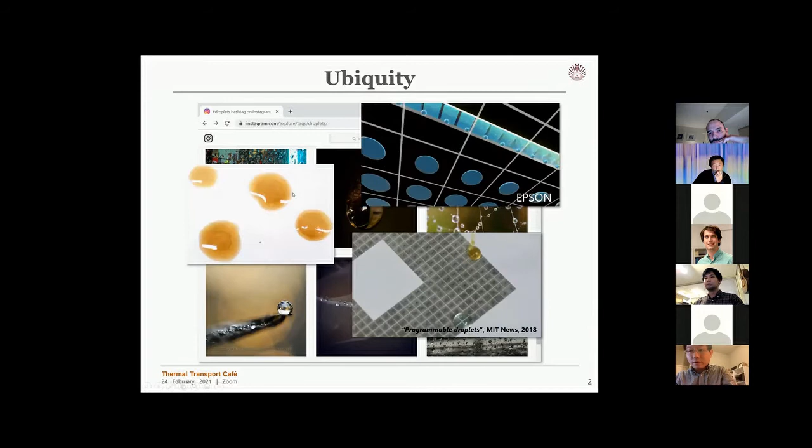So we make use of this so-called coffee ring effect. We can optimize the inkjet printing process or coating process. And if you can control the wetting behavior or flows, we can make a sort of droplet-based devices, making droplets more useful for a particular purpose.

I've studied many physics problems involved in droplet systems. I'd like to introduce a few of them. First, I have studied the wetting problem with droplets. We fabricated a surface which contains contrast of wettabilities, with micropillars arranged in stepwise patterns of different micropillar densities. If I place a droplet at the boundary between those two different patterns, we can see how the droplet moves. Obviously the droplet moves from the hydrophobic side to the more hydrophilic side, and we closely looked at how the drop walks toward the surface which has a lower contact angle.

And also I have studied the basic mass transfer problem, so basic evaporation process. Also, I have attempted to control the flow motion within the droplet using just the principle of Marangoni flows. I use a point heating source, either laser or micro heater, to generate the temperature distribution as I want. Following the temperature distribution, you can generate Marangoni flows in a particular direction. This is some of the work I've done for my PhD.

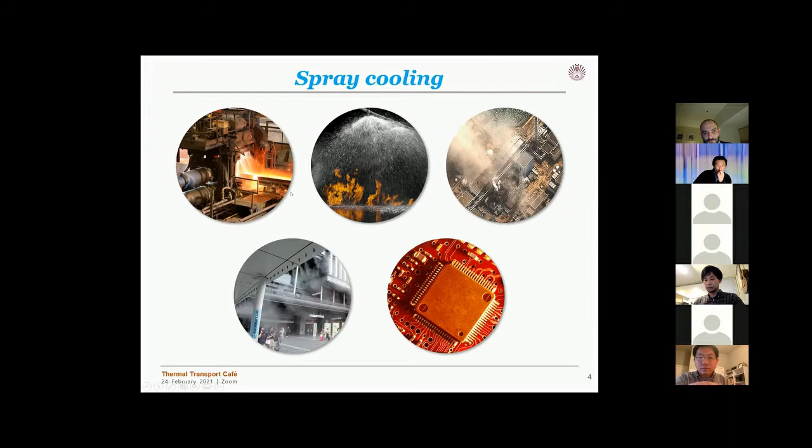But I'll be focusing on this particular application, so steel making process. This is a video of a hot rolling process at a steel company. You can see that this red steel plate, which means it's very hot—the temperature of this plate is around 1000 degrees Celsius—goes through the line, and you see lots of water sprayed onto the surface to cool it down.

Why we do this is we want to control the thermal history of the plate, so that we can change, or control, or create some microstructures within the material, which basically changes the strength of the material. So if you change the cooling profile, you have different microstructures, and you have a desired strength level.

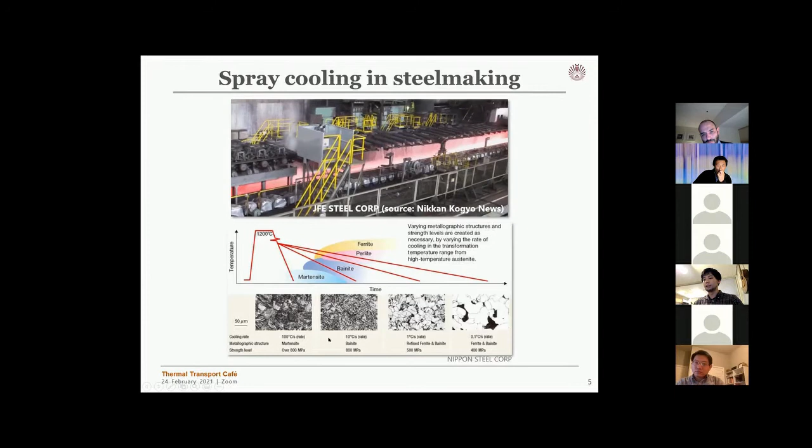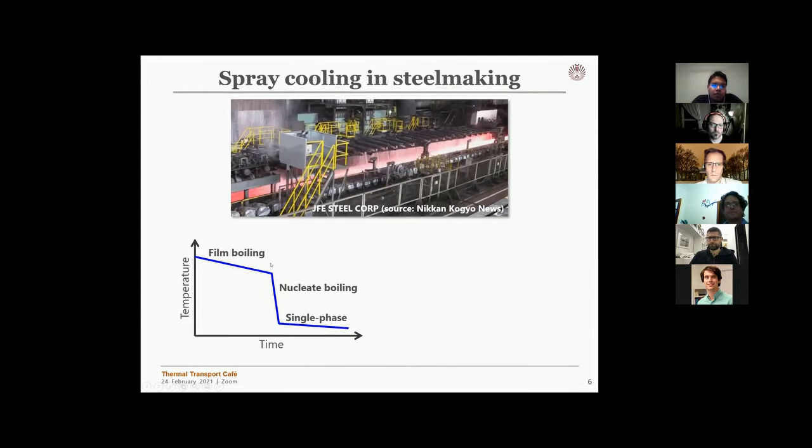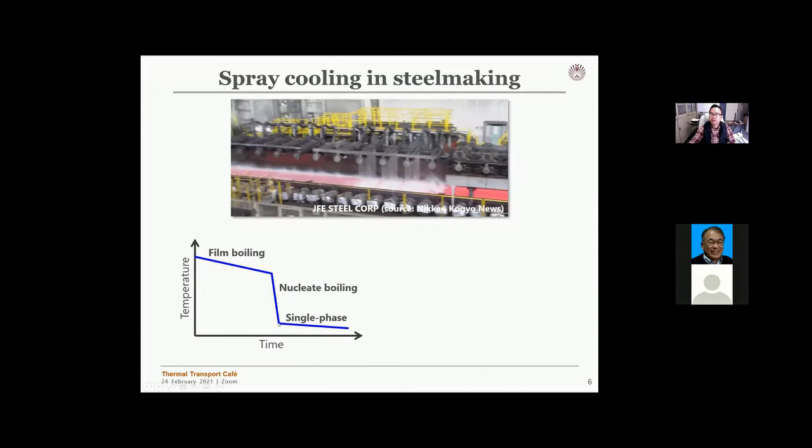This chart shows a typical cooling profile of this spray cooling process. If you take the temperature of the material as a function of time, since the plate starts at around 1000 degrees Celsius, you obviously start with the film boiling regime. Film boiling generally has poor heat transfer performance, so the temperature decreases, and at some point there's a transition from film boiling to nucleate boiling. When nucleate boiling occurs, the temperature drops rapidly to the saturation temperature, about 100 degrees Celsius, and then it goes to the single phase regime.

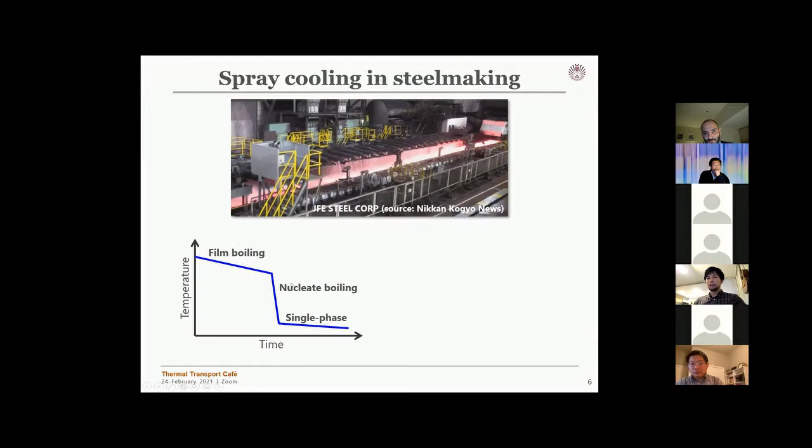What's important here is knowing when this transition happens, because once nucleate boiling occurs, the thermal history will be pretty much the same, since heat transfer performance is then dominated by nucleate boiling heat transfer. So it's very important to know how long the film boiling lasts and when the quenching happens, because this determines the whole thermal history, which determines the final product qualities.

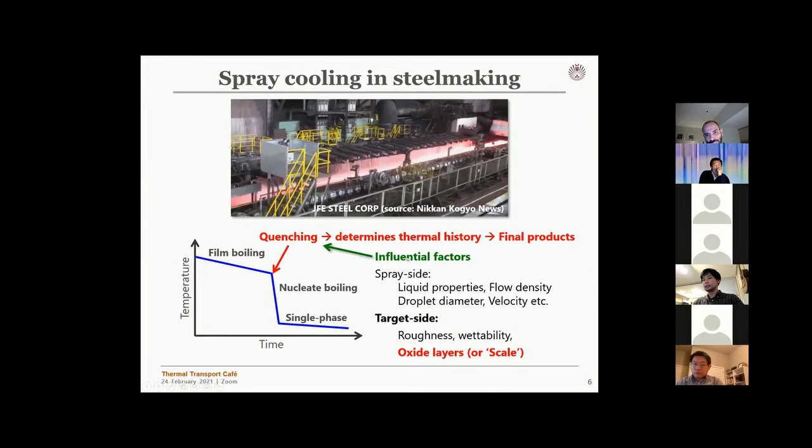It has been reported that there are many influential factors, and these can be categorized into two groups. First, spray side conditions - we can play with liquid properties, but in industry we basically just use water. We can play with flow density, droplet diameter, velocity - these are nozzle properties. These are factors we can control, so if I know how these parameters influence the cooling curve, then we can just change the spray conditions.

What can be tricky though is the target side - the surface roughness or wettability. Basically, if you have a rough surface and a more wettable surface, you increase the quenching point, so you enhance the quenching, which has been known.

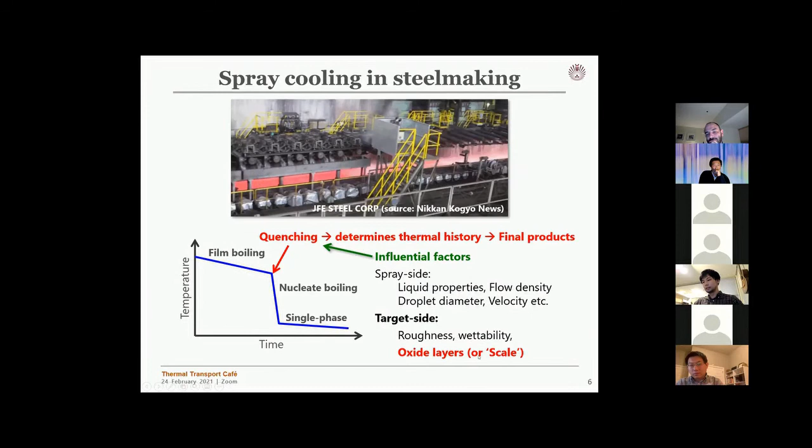Another problem I'm talking about today is the layer - oxide layers or scale. In this slide I'll describe how oxide layers influence the cooling curve. Since the steel plate is heated up to several hundred or 1000 degrees Celsius, you get oxidation on the surface, and it's been reported that if you have an oxide layer, you increase the quenching point. This sample has an oxide layer with scale thickness around 50 microns, giving a quenching point around 400. If you have thicker oxide layers, you get an even higher quenching point.

So you have oxide layer, you enhance quenching. But what's tricky is that you don't have oxidation uniformly on the whole surface - oxidation is something we can't control precisely. You have this local oxidation on the hot rolled material - this is a thermographic image of the process showing local cold regions. Basically, if you have oxide layers at random areas, you get faster cooling on those particular regions, while the rest has lower cooling performance.

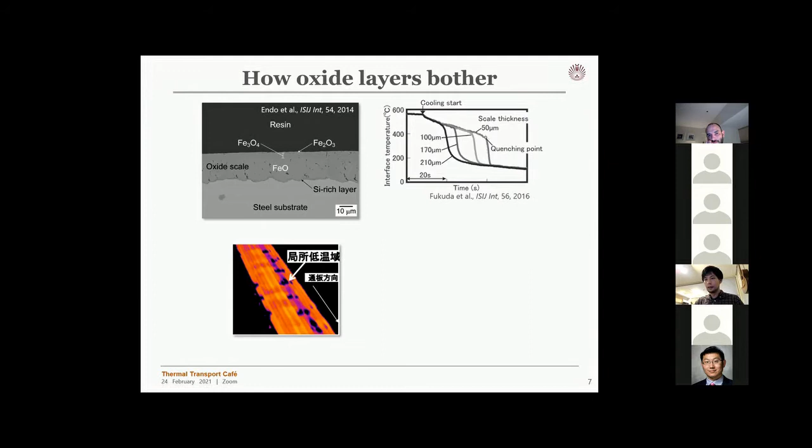If you have this non-uniform cooling profile over the surface, the material will accumulate residual stress, and the residual stress will cause cracking or catastrophic failure. We don't want this. So it's very important to know this - even though we can't control where the oxide layer will develop, we have to at least assess the risk if we know how these oxide layers influence the cooling performance.

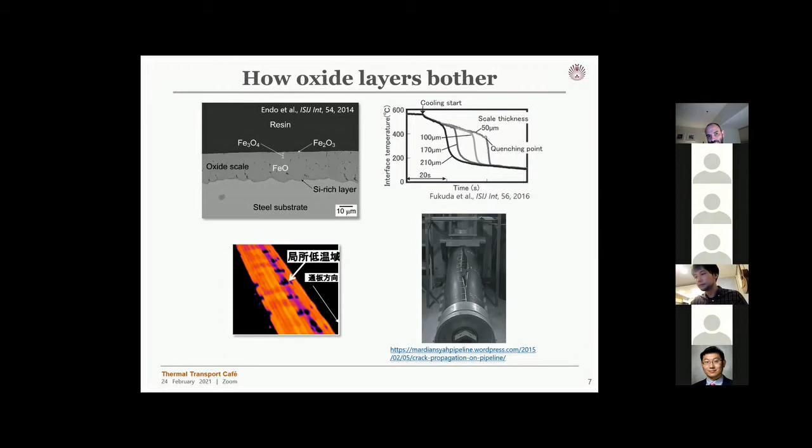That brings me to our work. The earlier part of my talk has been published in Applied Thermal Engineering in 2020, last summer. Most part of my talk involves many people - our master student Mr. Inoue, who's graduating soon, and two other students working on experiments and modeling. Also two graduates have worked on this project, and of course my colleagues, my seniors, and also industrial partners.

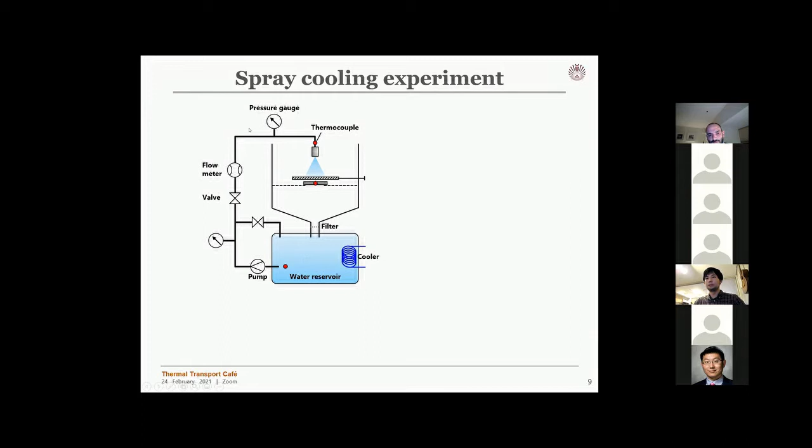So in order to study how these oxide layers affect the cooling profiles, we did some spray cooling experiments using this kind of setup - we have a water reservoir, the water is pumped up to the nozzle, and from the nozzle the water is sprayed onto the plate. We have a stainless steel plate here, coated with some oxide materials, and we have thermocouples embedded here so we can calculate the surface temperature - not really surface temperature, but the temperature at the interface between this oxide layer and the stainless steel plate, just by solving an inverse problem of heat conduction.

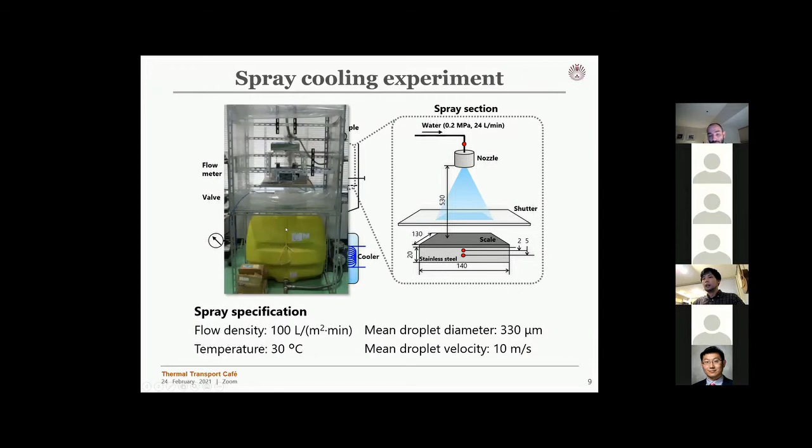These are some specifications of the spray used here. The flow density is around this value, and the mean droplet diameter was around 330 microns. Droplet velocity was 10 meters per second, and we kept the temperature of water at 30 degrees Celsius. This is a picture of our setup.

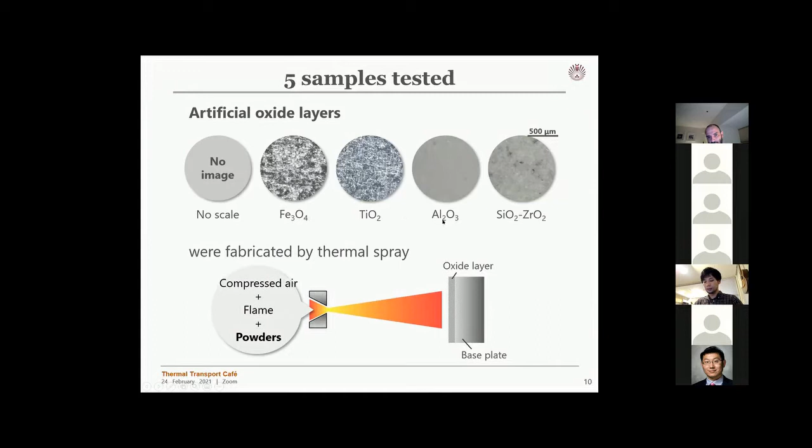We've tested 5 different samples. For reference, we had a bare stainless steel plate with no oxide scales, and 4 different compositions of oxide layers. We fabricated these samples not by oxidation, but by coating the materials using thermal spray method. We have 5 different thermophysical properties, and here I've listed the important thermophysical properties which I use later for further analysis.

We've also tested 4 different thicknesses, from 50 microns to 200 microns. As for the effect of surface roughness, we didn't see much variation, so in this study we've ruled out the effect of roughness. We also measured the contact angle at room temperature and found it to be about 70 degrees, with rather limited variation, so we've ruled out the effect of contact angle too.

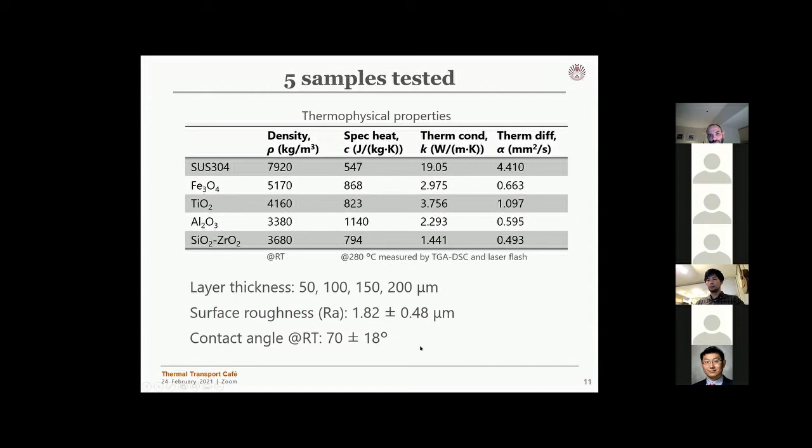This is the typical cooling curve we've obtained, showing the temperature at the interface between the oxide layer and the stainless steel plate as a function of time. We have a reference line here for the no-scale case, where there's no oxide layer. This is the basic cooling curve for the stainless steel plate.

We can define the quenching point here. This line corresponds to the film boiling regime, and this steep temperature drop corresponds to nucleate boiling. So the quenching point is here. If you have oxide layers, the quenching point increases. In this particular case, we had a quenching point just below 300, but with an oxide layer you get the quenching point just around 350 and even 400.

The peculiar case is that when we had a SiO2-ZrO2 layer, we didn't see the film boiling region at all. Once we started the spray cooling experiment, the temperature dropped rapidly to around 100 degrees Celsius, so we couldn't define the quenching point in this case. We also found this quenching point was inconsistent depending upon the composition of oxide layers.

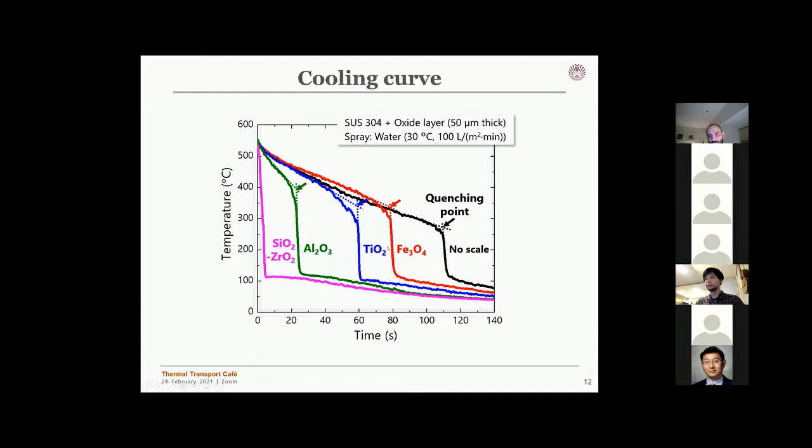From this experiment we've come to a question: the first is the inconsistent apparent quenching temperatures. The quenching temperature varied between 260 and 550 degrees Celsius, and it could even be higher.

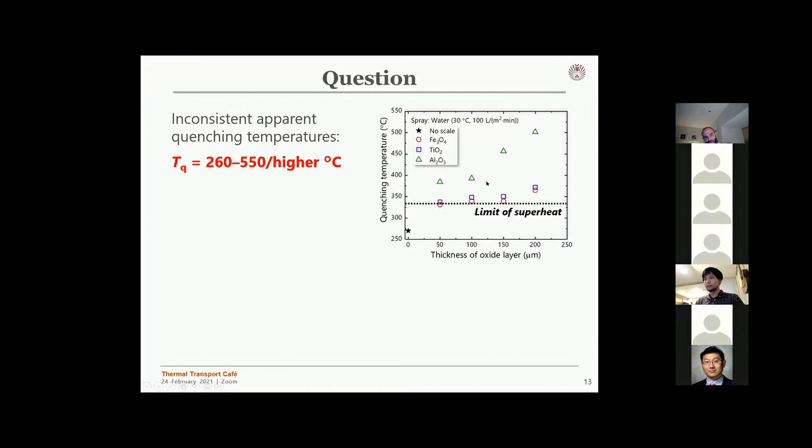This is the quenching temperature we've measured as a function of thickness of the oxide layer. If we increase the oxide layer thickness, we get a slightly higher quenching point, as reported previously. But if you compare the quenching point among these different oxide layers, there's this variation in quenching point that we didn't understand at this moment.

Also, if we think about the thermodynamic limit of superheat of water, which is around 330 degrees Celsius, this quenching point appearing at such a high temperature didn't seem to make much sense. So there's another question: are we violating thermodynamics here? These two questions I will address later by looking at the fundamental process of spray cooling, which is droplet impact.

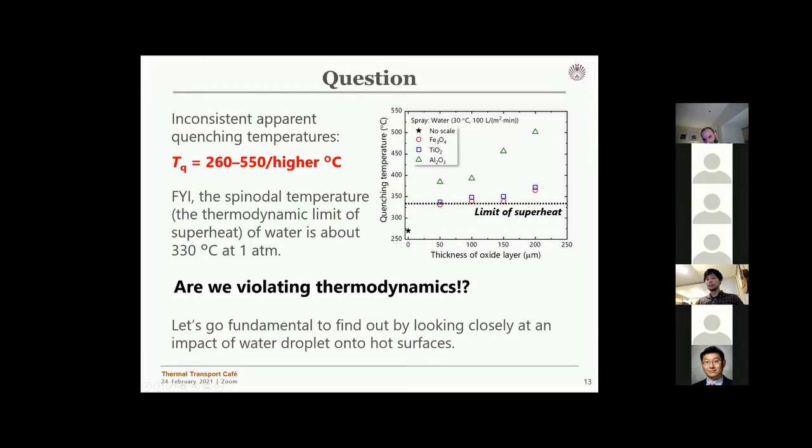We've done a secondary experiment on single droplet impingement. This is the setup: we have a cylinder of stainless steel with thermocouples embedded, and the stainless cylinder is heated using a heater. We have a tiny nozzle called a microjet dispenser, which can eject one single droplet, and we can precisely control the diameter of the droplet, its velocity, and its temperature, so we can focus on one single droplet as a fundamental process of spray cooling.

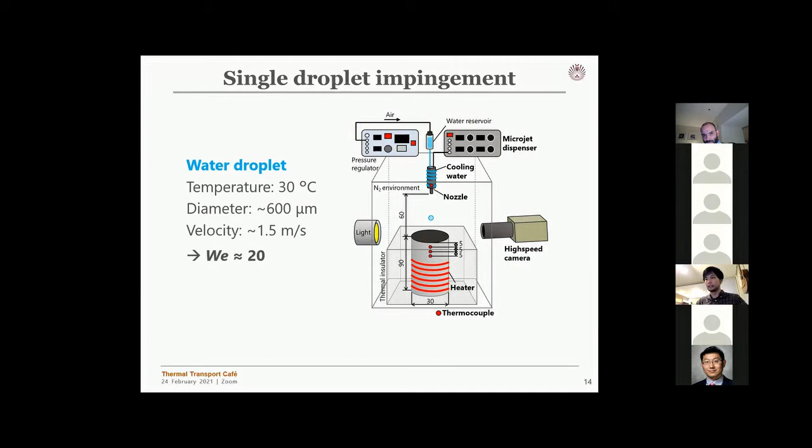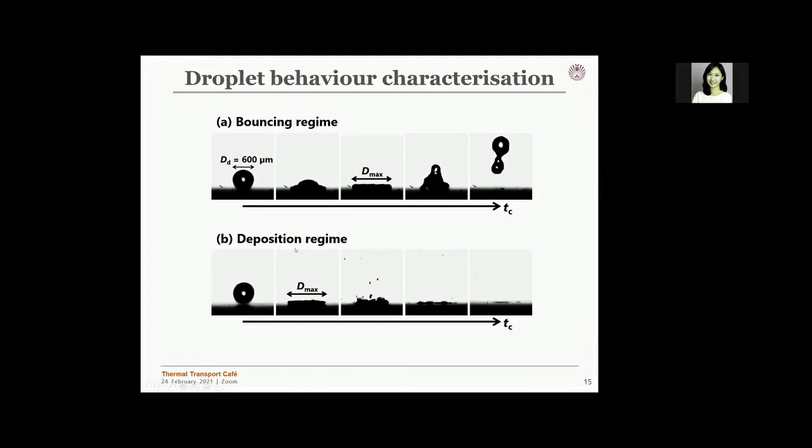In this experiment we limit the Weber number to around 20. In reality we have a wide range of Weber numbers, but limiting this number makes it easier to analyze. From this experiment we looked at droplet behavior depending on temperature range, and observed two different behaviors. At higher temperature we observed a bouncing droplet, due to the film boiling regime. If you lower the temperature, the bouncing regime ends and the droplet stays in contact on the surface until it evaporates away.

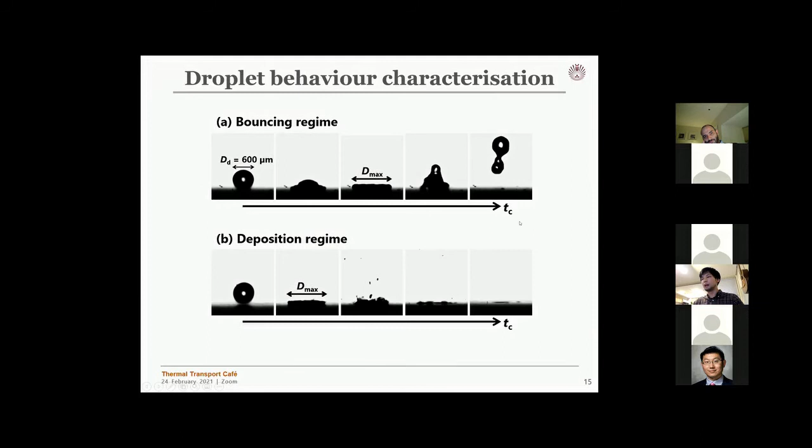We classified the droplet behavior into two regimes, and measured the maximum droplet spreading diameter as well as the contact time. We measured these two parameters as characteristics of droplet behavior.

We've also done some calculation based on the elastic model of droplet bouncing, which can be used as a reference. This is the contact time predicted by the elastic bouncing model, which assumes there's no liquid-solid contact. This corresponds to the film boiling regime, so in film boiling regime we should have a contact time around this value.

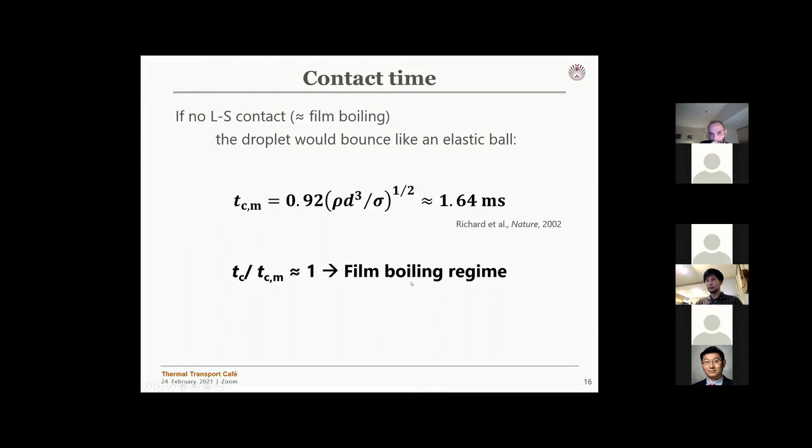So if I normalize our experimental contact time by this value, then this value, when we get it close to 1, means we have a film boiling regime. So this is just a useful reference value.

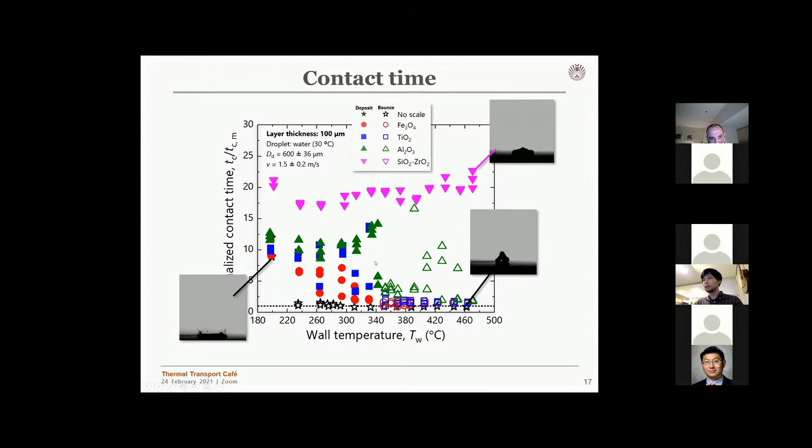Oh sorry, I should have shown this video. So at higher temperature, we have this bouncing regime, and at lower temperature, we have this boiling or evaporation regime. And also, like in the spray cooling experiment, we had a particular case for silicon dioxide where we didn't have bouncing regime at all in our experimental range.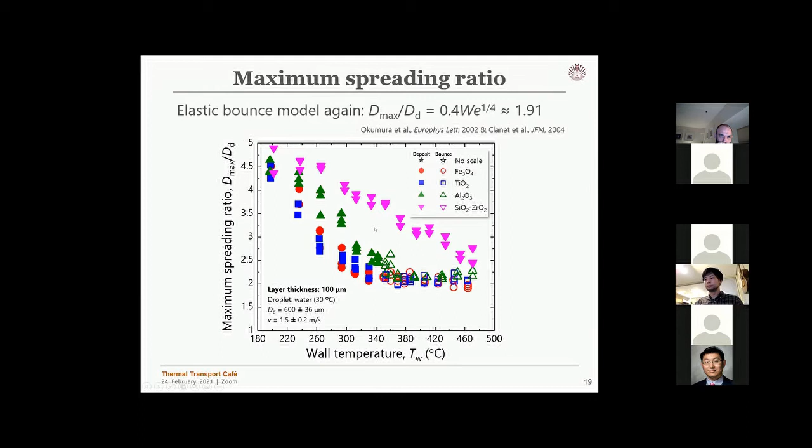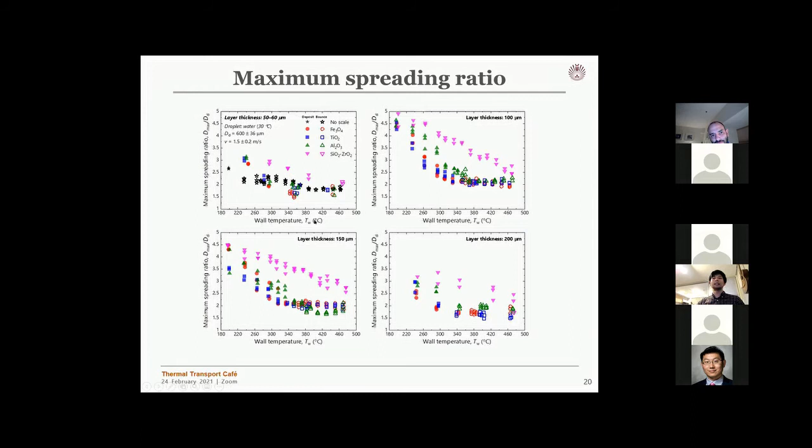And the same can be said for different layer thickness. So from these figures, we had a problem with this wall temperature here. So from this experiment, we thought that this wall temperature doesn't represent or doesn't explain why this transition happens. So we have to define something else.

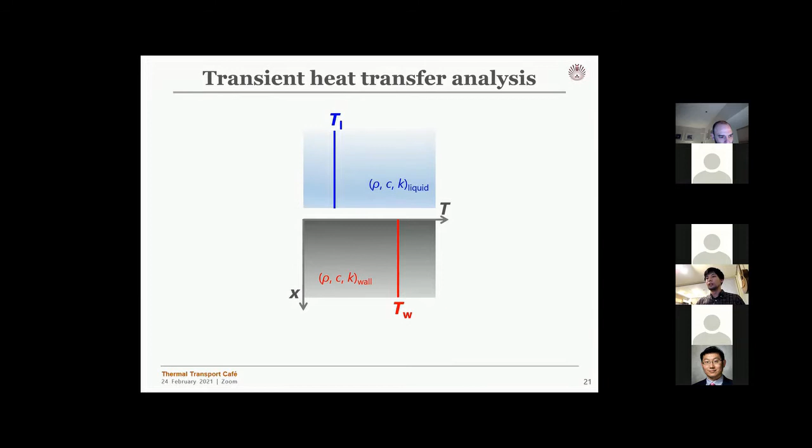Okay, so we defined a so-called contact surface temperature, which can be calculated by transient heat conduction analysis. So this is just a basic case - basically the contact of two semi-infinite bodies.

From this model, we can get the surface contact temperature, somewhere around here, by using just these parameters that we know: the wall temperature, the droplet temperature, and the thermal properties of the sample and the droplet.

So this means that when these two bodies, droplet and the wall, come in contact, you have a temperature drop from the wall, and a temperature increase from the liquid. So at the interface, where this temperature profile meets, we have this interfacial temperature.

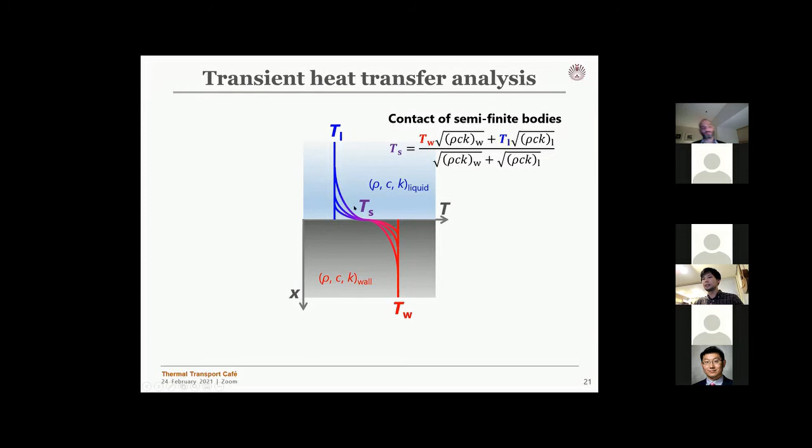Okay, so if you have rather high thermal properties parameters, we don't have much gap between those two. So if you take 420 degrees Celsius wall temperature, the contact surface temperature will be somewhere around just below 400.

But if you have an oxide layer material with very poor properties, a lower value of this property, you will have a huge temperature drop. So if you take 420 degrees Celsius again, you have a contact surface temperature of 250 or something like that. So there's a big gap between those two temperatures.

Okay, so then I have replotted the normalized contact time and also maximum spreading ratio as a function of the newly defined contact surface temperature. And now the data plot has shifted toward the left, lower temperature region, and now you see the clear trend - clear transition between the two different regimes, both in the contact time and the spreading ratio.

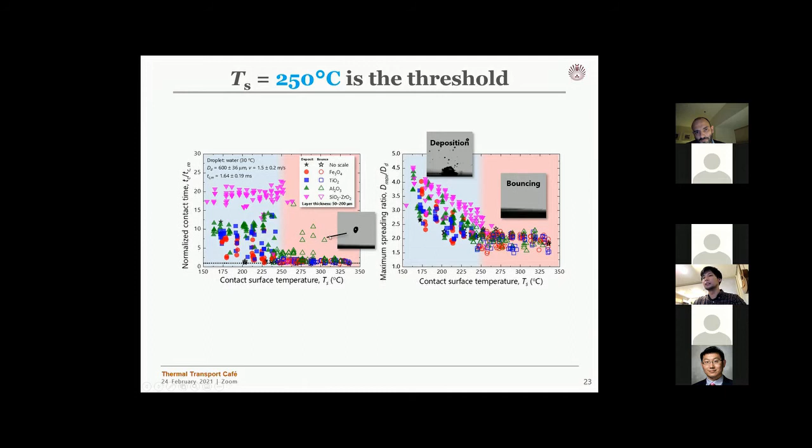Okay, so we had some outliers here, but we actually associated this behavior as bouncing regime, because if you look at this video, you see the bouncing droplet wants to bounce off the surface, but actually there's some local variation of temperature or roughness. The droplet stayed in contact in a very local area, so we ended up with rather high contact time, but still this is bouncing regime.

Okay, so we've also tested the effect of droplet temperature, and it didn't really matter in terms of the transition of droplet behavior. But what it tells is that if you have a higher temperature, then you eventually have a higher apparent quenching point, because the surface contact temperature is dragged toward the higher temperature if you have a hotter droplet, if that makes sense. Okay.

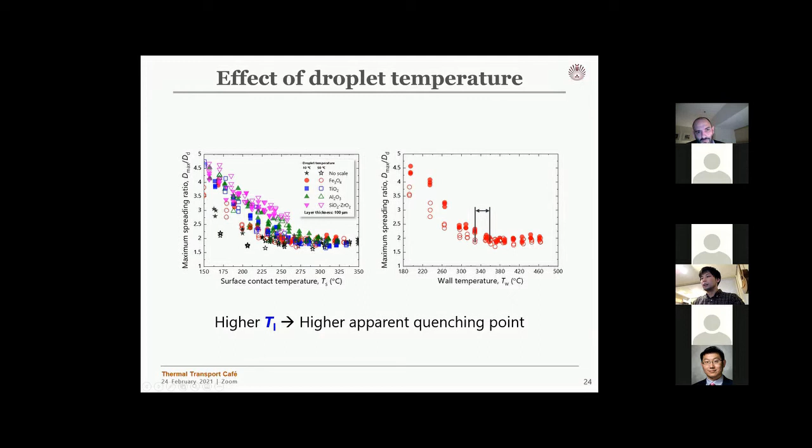So then I'd like to move on to the modeling of cooling curve. From our experiment, still a single droplet impingement experiment, not exactly spray cooling, we can infer that quenching is likely to happen when the surface contact temperature is about 250 degrees Celsius. There's still a question why 250, but we'll leave it there.

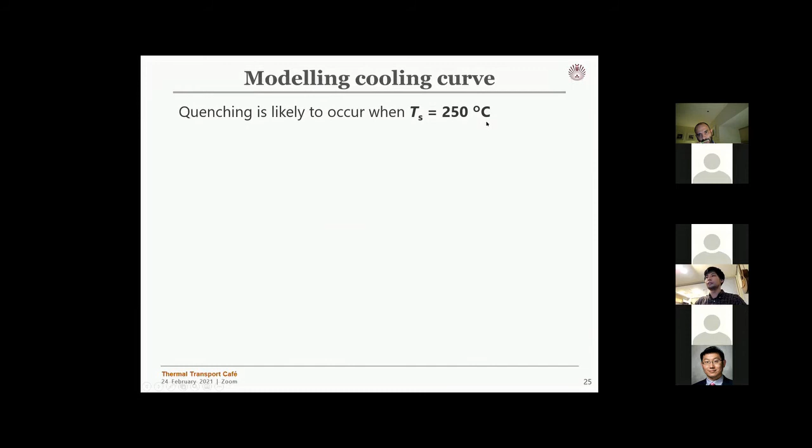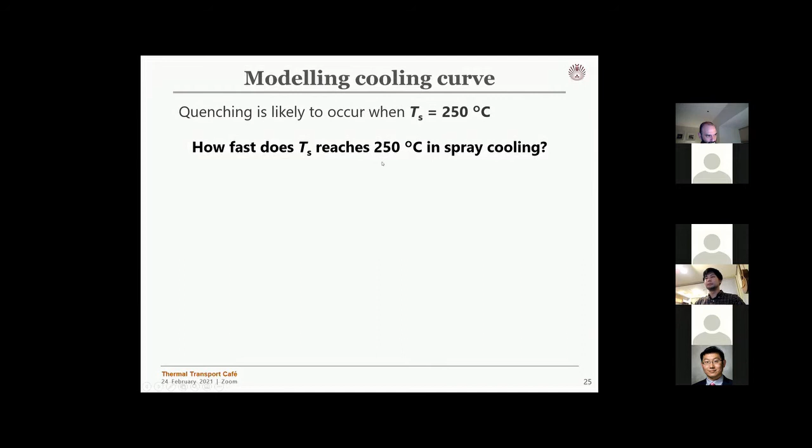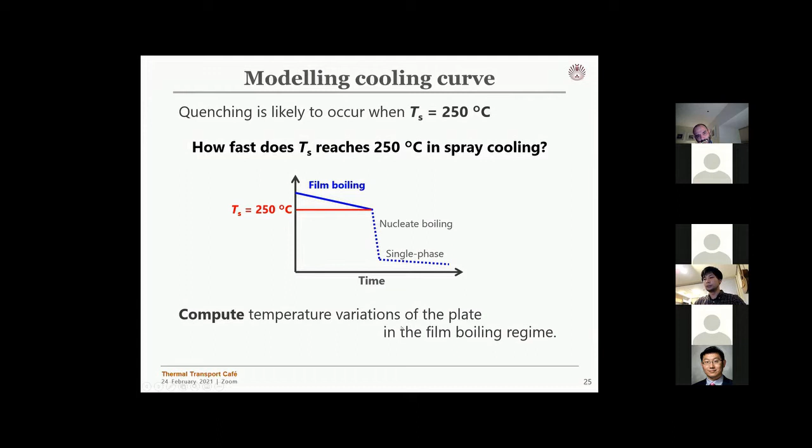The next problem is how fast does this temperature reach 250 in spray cooling? We want to know how this slope, how this temperature changes and reaches there. So basically we want to model the film boiling cooling performance in spray cooling. We did some computation and developed some model, so I'd like to show some of it.

We consider a simple case scenario: a one-direction transient heat conduction problem in the plate. This is the model of the plate. So this is just simple one-dimensional heat conduction, and we have to give two boundary conditions. One is the adiabatic condition at the end of the plate, and from the surface where the water is sprayed, we have to give some sort of heat flux. So how do we model this heat flux?

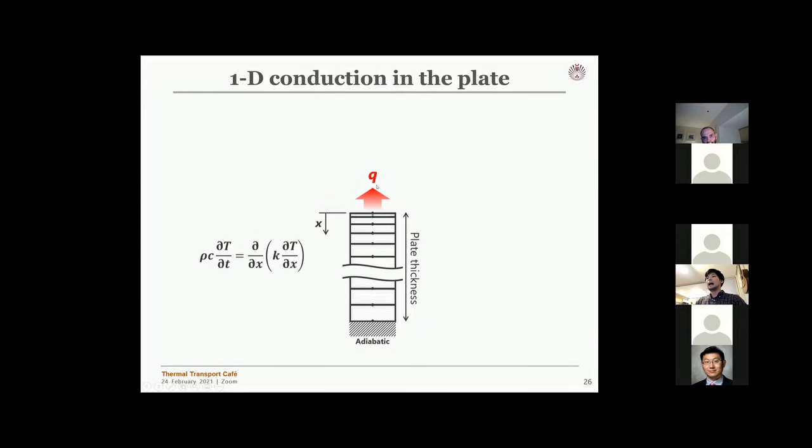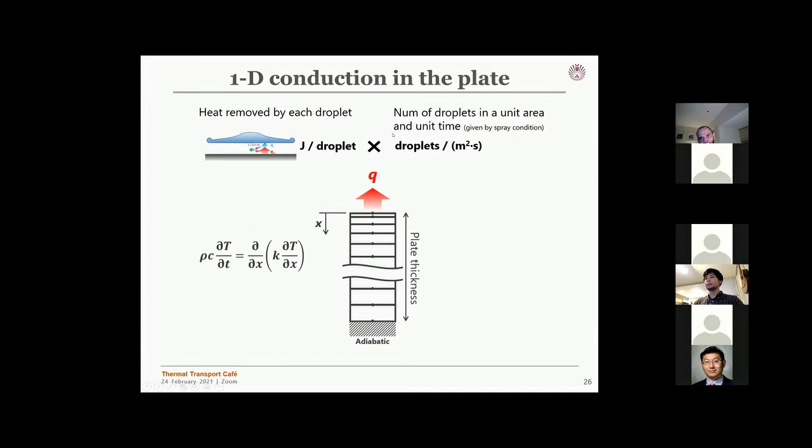We can estimate the heat removed by each droplet using a particular model, to estimate how much heat is removed by the droplet. The unit will be joule per droplet. We can multiply this by the number of droplets in a unit area and unit time, which is basically the spray condition. If you multiply these two parameters, then we can get the heat flux at the surface.

As for heat transfer through the vapor film, we follow the analysis by the French group, published in 2018. So we have this schematic model: the droplet is floating on the vapor film, and heat from the wall - some of the heat will be transferred to the droplet, and some transferred to the vapor. The heat transferred to the droplet, denoted as QL, is partially used for evaporation. So the heat goes like this, and we can make a heat balance equation considering this.

Also, since the vapor layer should be much thinner than the droplet size, we can apply lubrication theory to model the flow motion inside the vapor layer. Basically we assume Poiseuille flow, with mass conservation, heat balance as explained, and momentum balance - we have to calculate the pressure in the vapor film such that it can lift and keep lifting the droplet. Also heat transfer inside the droplet should be calculated, and from these submodels we can eventually get the wall heat flux.

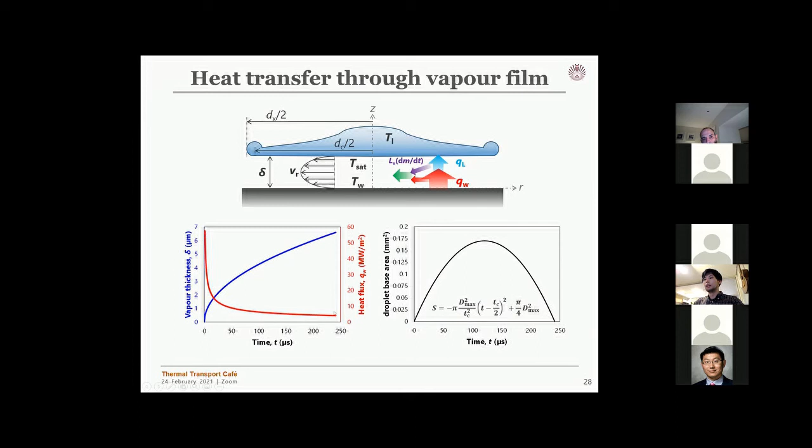This is the sum of the calculation we've done. On the left-hand side, we plot the vapor thickness as a function of time, and from the vapor thickness we can also calculate the heat flux as a function of time, which should look like this. To get the amount of heat taken by the droplet, we have to multiply this heat flux by the droplet base area, which is the heat transfer area.

From experimental observation, we know that the droplet base area changes as a parabolic function of time, so we can model the droplet base area like this. If you multiply these two and integrate it over time, then we get the joule, the amount of heat in the unit of joule.

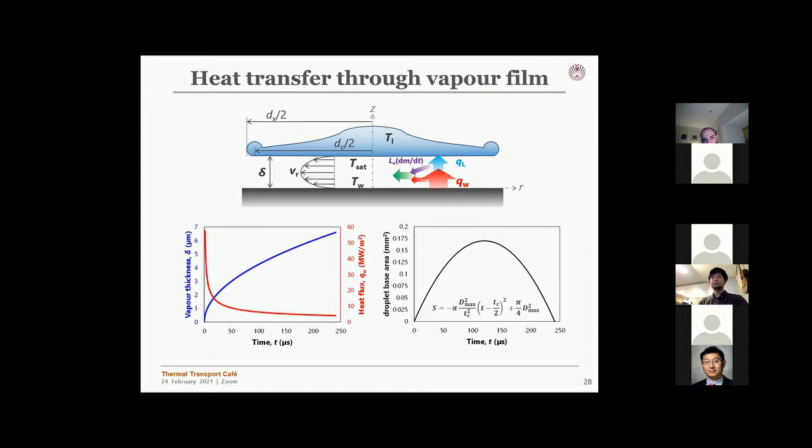So this is how we model the heat transfer through the vapor layer to give the boundary condition of this 1D heat transfer problem. This is the computation procedure - it's not that complicated, I guess.

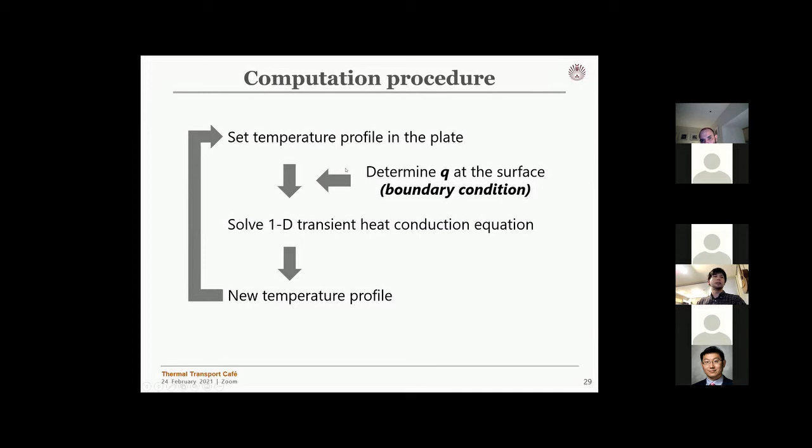First we have to set the initial temperature profile in the plate, and then we give this boundary condition of heat flux, which we determine by the model I presented earlier, and then solve the 1D transient heat conduction problem to get the new temperature profile. We set this new temperature profile as the new initial condition, and repeat this calculation until the surface temperature reaches 250 degrees Celsius.

So this is just recently we got done, and we now plot this temperature profile as a function of time. As reference, I plotted here in the black line the cooling curve obtained by our experiment, and this red curve is the cooling curve predicted by our model, just as I presented. So this seems to be, it doesn't look very bad, right?

So the cooling rate is on the similar order of magnitude, so that's okay. But still, the cooling rate looks a bit slower than the actual data. And also we have this blue curve here, which is a heat transfer calculated using the so-called wetting model. This wetting model assumes basically there's no film layer between the droplet and the substrate, so this is just complete direct heat conduction from the surface to the droplet. These two are basically two different extreme cases.

And if I look at this figure, I can infer that in reality, as in the experimental curve here, we have two combined heat transfer mechanisms. Most of the droplet is floating on the vapor film, so it has film boiling heat transfer, but some of the region of the droplet may be in contact with the surface. So it may make sense that the actual cooling curve should be somewhere in between those two curves.

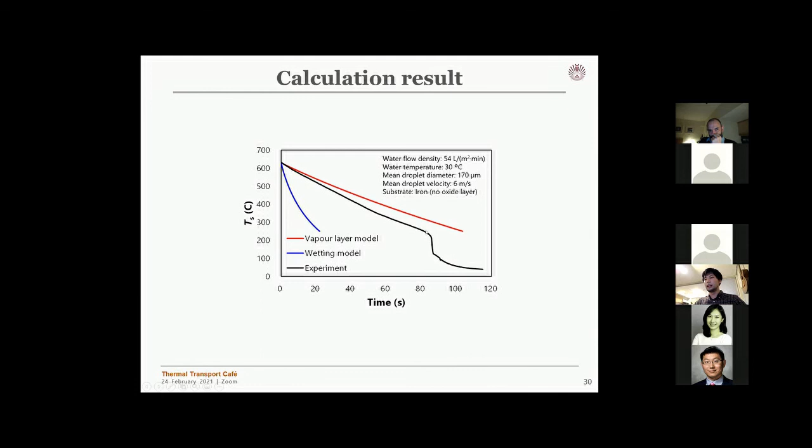But we haven't actually optimized the calculation procedures, grid size, or time intervals, so we shouldn't rush into this conclusion. But so far this is our idea. Also, since we had a difficult time, we have some limitation in laboratory work, so we decided to do some CFD modeling.

So we used ANSYS Fluent to solve the VOF model of the droplet. We have this schematic as a model of calculation: a stainless plate heated up to 400 degrees Celsius, and a droplet here. You can see the boundary conditions, something like this. And this is the actual mesh or grid that we used.

The initial temperature profile is set by natural convection, so we calculate this temperature profile before we induce droplet impingement. We also set the contact angle as 180 degrees so that we can sort of simulate the film boiling regime. It's not completely realistic, but I wanted to see how the droplet behaves on the surface in the film boiling regime. Obviously we have some difficulty modeling the phase change problem, so we have no phase change here.

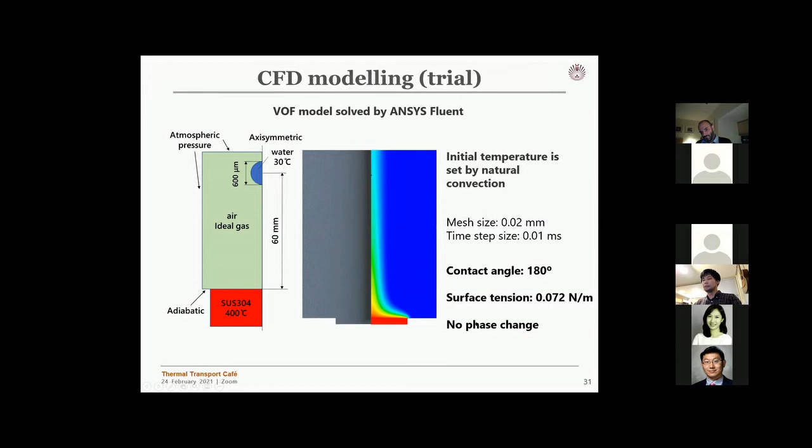The droplet behavior looks okay if I compare it with the experiment, and the temperature variation seems reasonable—well, I shouldn't say reasonable because this is not a very realistic model, but we can actually quantify the temperature variation within the substrate.

Also, from this calculation, we estimated the heat taken by the droplet, and we got this value: 6 millijoules per droplet. From the vapor layer model I presented earlier, the heat removed by the droplet is around 0.2 millijoules. And from the experiment, we also obtained a rough estimation of heat transfer by the droplet of around 1 millijoule. So I would say they are not too far from each other, but the experimental data was somewhere between the two.

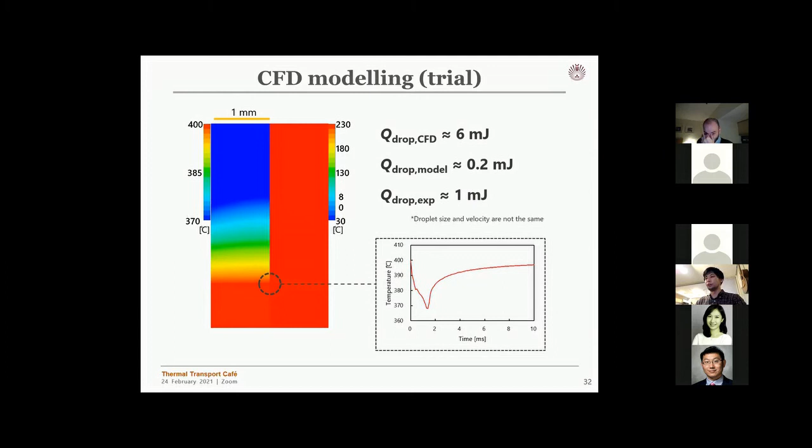Okay, so I have talked too much today, but these are the basic conclusions of my talk. I have shown you two different experiments. From a spray cooling test, I have pointed out that there's a huge impact by the oxide layer on quenching temperature, so we have inconsistent apparent quenching temperatures. Also, the cooling rates are different for different oxide layers.

And to see why this happens, we did a droplet impinging test, and we found that quenching might occur at a surface contact temperature of around 250 degrees Celsius. But the question remains, why 250? That's something we have been working on right now. But if you have any idea, please share with us.

And also, we've been doing some modeling, which is underway, and I wanted to show you some of our progress today. So thank you very much.